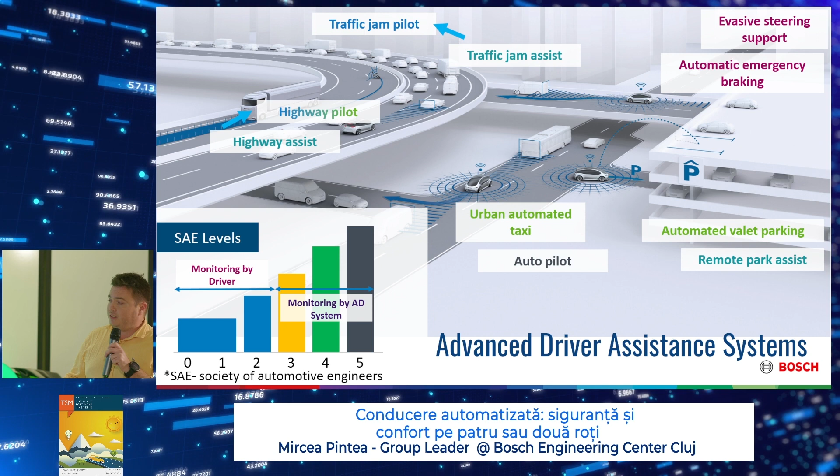Okay, good. As my colleagues mentioned at the beginning, we have the levels of autonomy in driving. We have from 0 to 5, and you will see that each function has a specific level considering the complexity of the function.

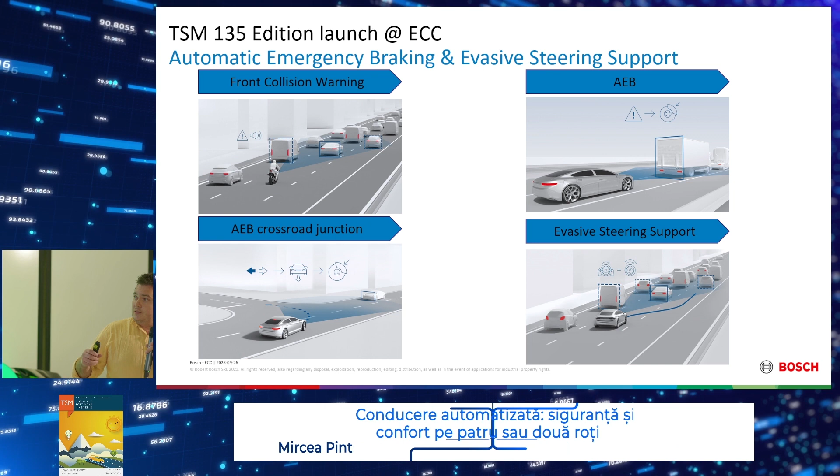If we are starting from basics, literally basics, we have the front radar, and we have the function for front collision warning. For example, if you are going with a car at around 100 kilometers per hour, you have a vehicle in front of you, and the vehicle is either stationary or moving very slow. The first step is that you will receive a warning on your dash telling you that you should brake. This warning should be either a sound or a message on your dash.

If we go to a next step, how we can extend this front collision warning, we have the actual AEB, automatic emergency braking. This actually calculates if the driver is able to stop in the end, and if not, or if the driver is not doing anything, the vehicle will actually stop stationary before an object.

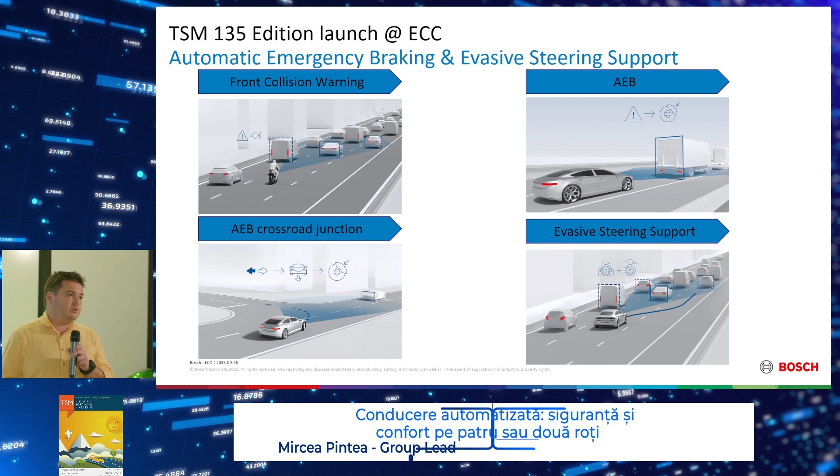Imagine that the driver is still pushing the brake a little bit, but not fully, and the car is realizing that there will be no possibility to stop the car. What will happen? The car will take control and will automatically apply full braking power in order to stop the vehicle before the object that is in front of the car.

If we take the next step, to make it even more complex, we have the AEB for crossroad junctions. Imagine that you are at a crossroad. You have a vehicle either coming from incoming traffic, so from the front, or you have a vehicle coming from the left or from the right. You have the video and also the radar, which detect that vehicle, and it's actually stopping the vehicle in the end to not have an accident.

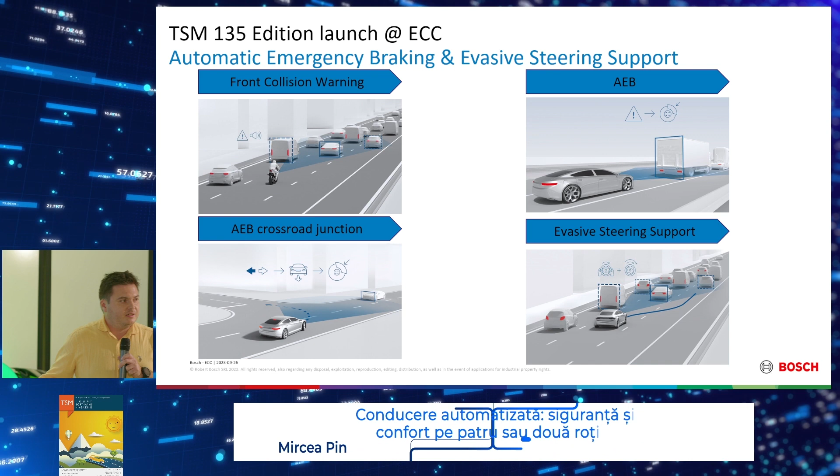Even more complex. And here we were discussing the levels, level 1, 2, 3, 4. My colleagues presented at the beginning that there are vehicles on the market with level 3, the Mercedes. Actually, that car is able to go 80 kilometers per hour on the highway. If I remember well, that is the maximum speed. And in certain conditions, it's able to take full control of the car.

Now, imagine that the car is not able to stop and has to do a right turn or a left turn. With the sensors that we have on the vehicle, the car is actually able to change the lane. For this, we will use all the sensors on the vehicle. We have the corner radars, which are mounted in the back corners of the car. We are using the front camera, front radar, and in the end we are giving the command to the steering to move left or right in order to avoid the accident.

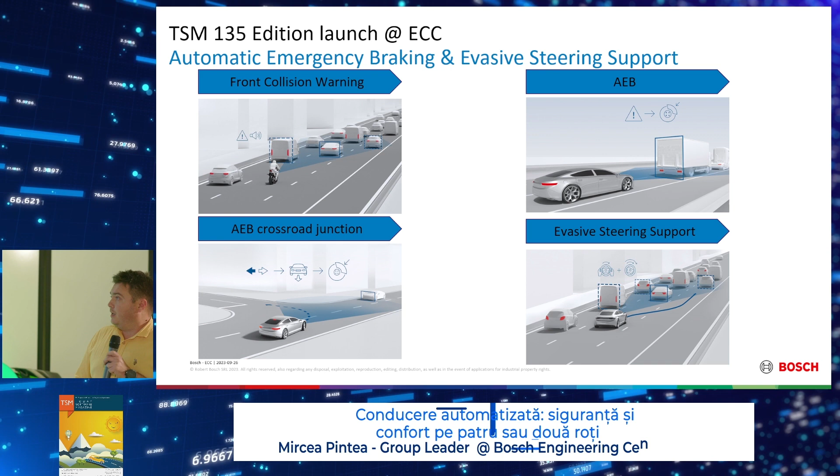What I didn't mention at the beginning is that these ADAS functions are split into active or passive functions, but also ADAS takes care of safety and also comfort. The functions that I mentioned before are specifically for safety, so they are braking functions or evasive functions.

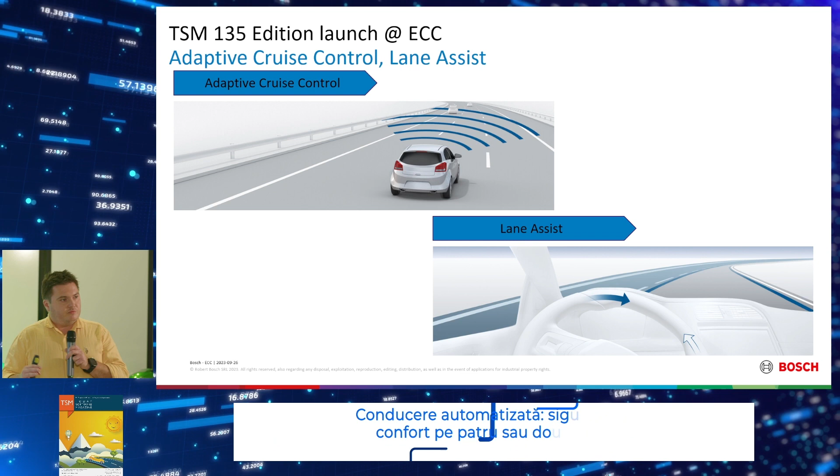And if we are speaking about functions that help us and make our life easier, we are speaking about the comfort functions. One of the basics for the comfort functions is adaptive cruise control. This was the basic. It was invented years ago. It is available on a lot of cars on the market, on the road, and is quite robust for the moment.

But if we make it even more complicated, so not having only the radar sensors, but also the video sensor, we are able to also keep the lane. So we have a car which is able to either keep itself between the lanes or give a warning that we are leaving the lane.

So we have the lane assist function, which can go from warning to centering lane keeping, where the car is actually even able to steer between the lanes and fully go forward. If we are making it even more complex,

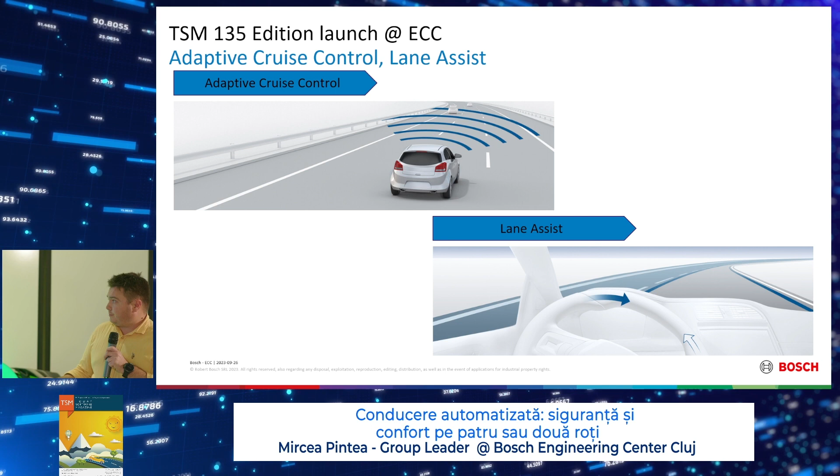then we are speaking about the blind spot monitoring. And for blind spot monitoring, we are monitoring actually the back of the car. We are having two main sensors in the back of the car, the corner sensors. We are monitoring an area behind the car of around 3 meters, which is considered the blind spot monitoring. And with the radars, we are tracing the objects which are coming from far away.

When the car actually is entering the area, which is specific to the 3 meters square in the back of the car, we are just able to give a warning to the driver, and we have a warning in the mirrors. So we have a LED, which is lighting up and informing that eventually we have something in the blind spot.

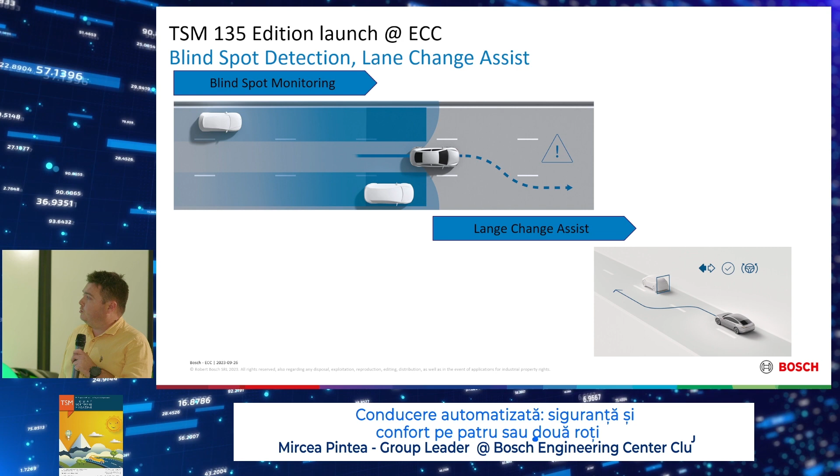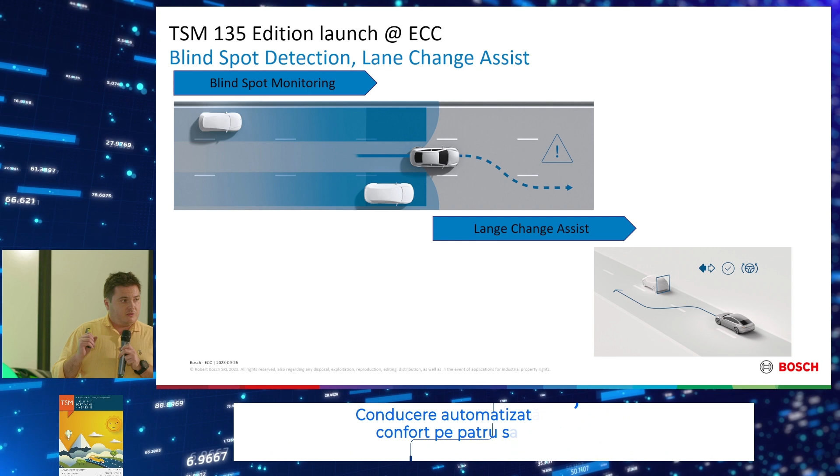If we are doing even more complex and we are using also the functions that I mentioned until now, we can speak also about the lane change assist. Here we are not changing the lane because of an emergency in the front, but somehow it's a comfort function. We are monitoring the rear part of the car, we are monitoring the front part of the car, and we are able to overtake somebody on the highway and go forward.

And if we are putting all of these functions together, we are reaching the pilots. We have traffic jam pilot, highway pilot, where somehow we have the vehicles taking care about the road, but there has to be full supervision of the driver.

How these are working, for example, traffic jam pilot. Imagine the roads that we have in Cluj, where we have a lot of traffic. You activate that function, you set up a speed, and actually your car is following the traffic that you have in front, capable to brake, accelerate as many times as is needed. Of course, it has also a safety function: if there are more than 10 seconds, for example, automatically it's disengaged, and in order to re-engage it, you need to press a button.

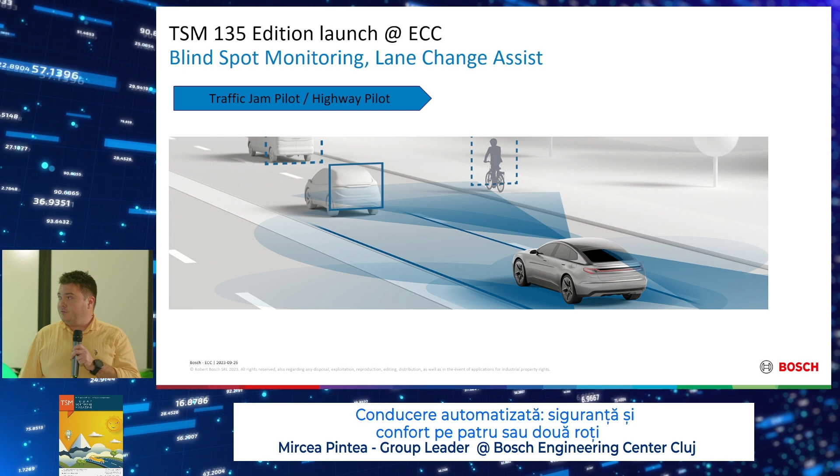For the highway pilot, something similar. The car is able to follow the cars in front of you, is able to change lanes, and is also able to detect the obstacles in front of you. We discussed about ADAS, and somehow the functions are already there since a while. Nothing necessarily new, but somehow they are the basics for driver assistance and for the future autonomous driving.

If we are speaking about motorcycles, this is a completely new world. This is something completely new, and even on the market, there are few motorcycles which are able to cope with the functions that are currently developed. What do we have on the motorcycle? We have it also here. We have a front radar, which is mounted in the front in order to scan the traffic in front. We have the HMI, so the dash, where you have the warnings, speed, and any message that is needed.

Then you have the engine control unit that you will see later that we need to control. We have the motorcycle stability control ECU, which is taking care about the braking of the motorcycle, and also we have the rear radar, which is monitoring the rear part of the traffic.

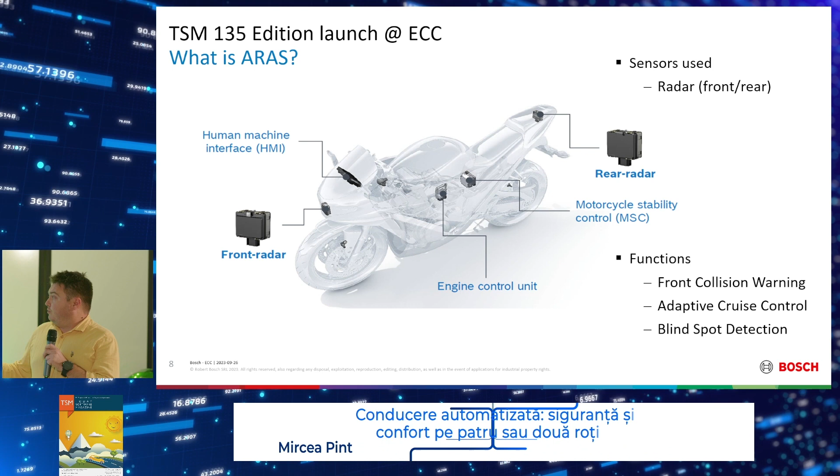If we are speaking about functions, definitely we don't have braking functions. Imagine having a full autonomous braking on a motorcycle. An emergency braking that will happen on a motorcycle will definitely be the end of the rider. Adaptive cruise control is something that we have. Front collision warning, so just a warning for the collision, is something that we have, and blind spot detection also is available.

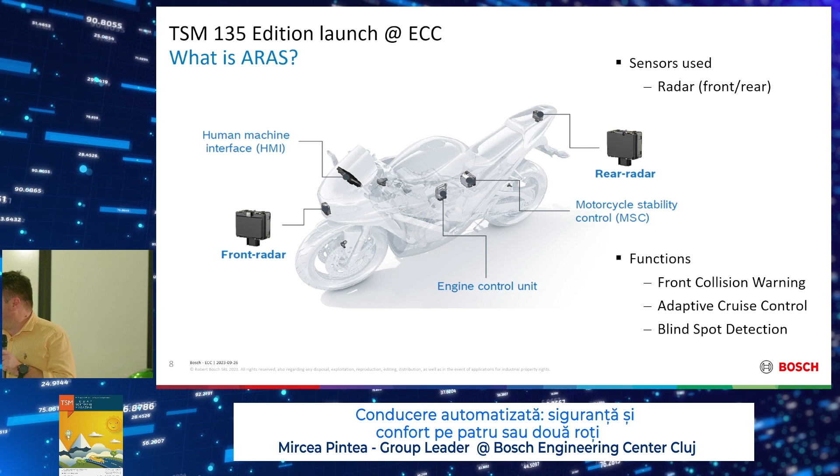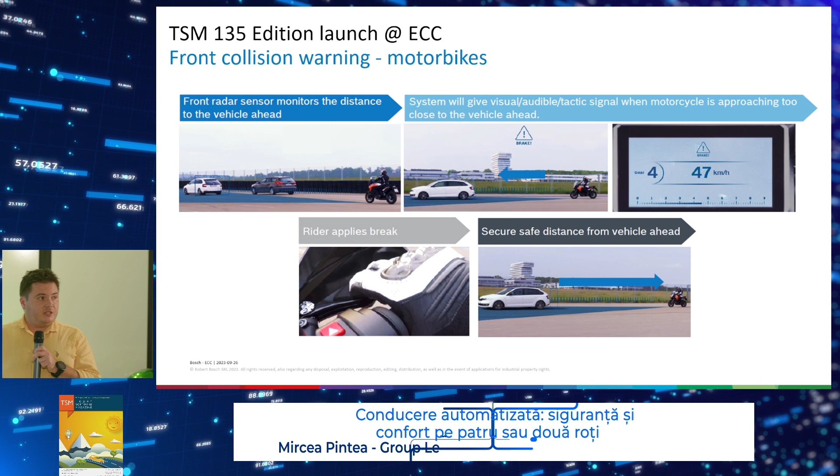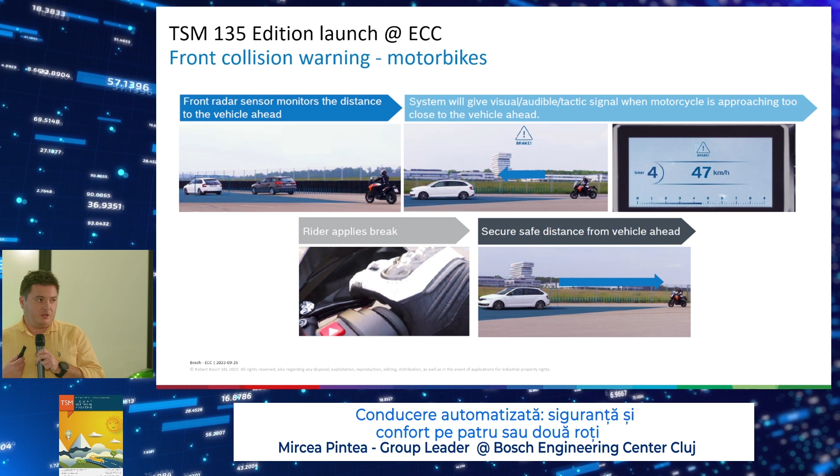How actually are these working? Exactly like I explained in the case of the vehicles, we have the target vehicle in front of us. The motorcycle is detecting that we might not be able to fully brake until we reach the target vehicle in front. And in the end it is giving us a message, please brake, and is flashing a light. You will see it in the movie that I will show you a little bit later. Our responsibility is fully there, so we need to brake until we stop. The motorcycle will not stop by its own.

If we speak about adaptive cruise control, it's exactly the same like in the cars. Nothing fancy, but again, it's a little bit more difficult than in the case of the vehicles. The driver is selecting a specific speed. The radar in front is able to monitor a target in front, and is able to select a specific speed in order to keep a safety distance from the vehicle in front.

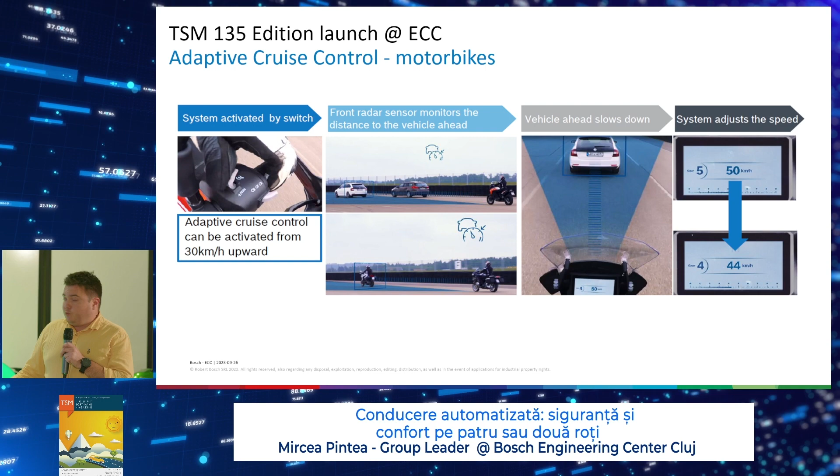In this case, the vehicle is able to brake, so the motorcycle will brake autonomously by 30 kilometers per hour. So the minimum speed will be 30 kilometers per hour for it, and it will monitor continuously the traffic in front.

Another feature that we have on the motorcycle also here is the blind spot monitoring. So we have the rear radar, which is monitoring the traffic behind the motorcycle. We have two LEDs in the mirrors, and in case we have a vehicle in the blind spot, the LED will light up.

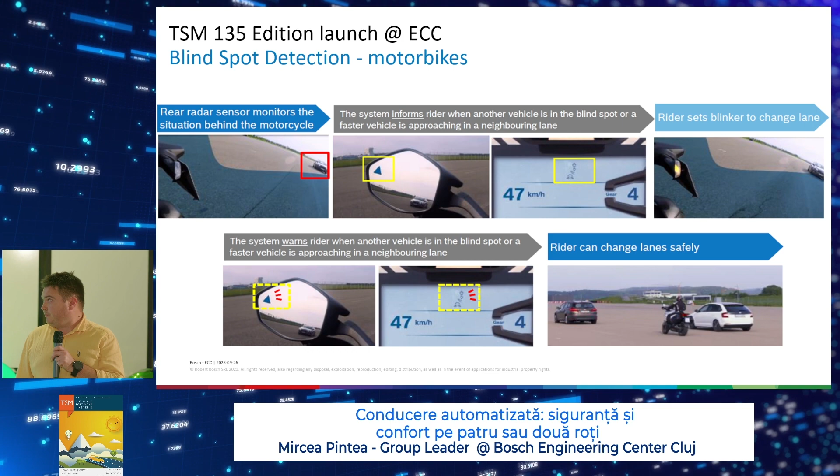If we go forward, we will see exactly how it's happening. And this is a video made by my colleague. Please look at the dash. So follow the dash, not the vehicle in front. You saw that the car was moving very fast in the back of the car, and now you see the warning. So this is the pre-warning that we really need to brake, otherwise we risk a crash. Again, a pre-warning in order to brake.

Here my colleague will do the demo for the ACC. So my colleague is setting up the ACC. He activated the ACC, and we are tracing the vehicle in front of us. The target speed now is 70 kilometers per hour, but the vehicle in front is having 63 kilometers per hour. So we are keeping the safe distance from the vehicle in front of us.

You will see that my colleague will accelerate in the end. We have the target speed of 90 kilometers per hour, and the vehicle in front is following him with 67 kilometers per hour. And you see another vehicle which is entering in front of the motorcycle. So in that moment, we had a second target, and we needed to brake.

What happened? There was also a blind spot part, but I don't know why it stopped. We had a demo also for the blind spot. No, it was not a crash. We managed to stop in time. It followed the new car. It stopped, and afterwards the car accelerated, exited the target that we had, and we had to follow again the red vehicle. But I don't know why the video stopped.

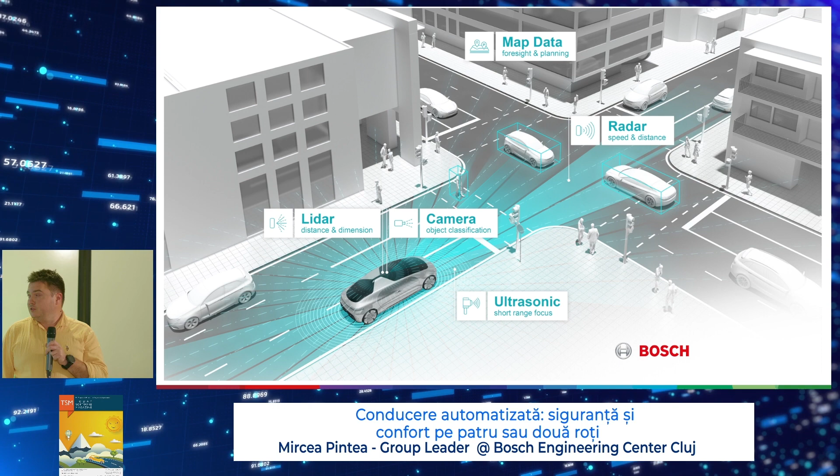I presented to you some basics, really basic functions. So ADAS functions that you see today in your vehicles. In order to go forward, beside what was presented until now, fancy ECUs which are able to cope with a lot of calculations, sensors that are ultra performant in order to detect the environment in front of them, we had also to consider the GPS location and also the car-to-car communication in order to have the future autonomous vehicles. Any questions?

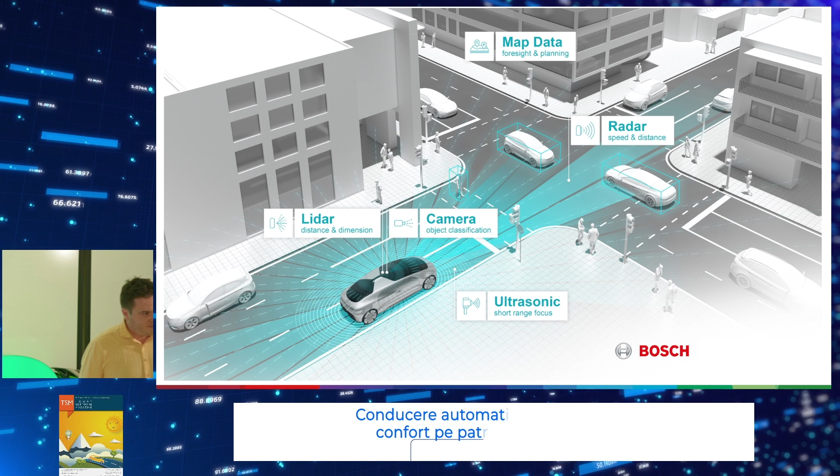Mircea, you presented many solutions. How is the hardware solution comprised? I mean, each sensor has its own processing unit, or they are split between video processing and sensor processing and so on, and the radars?

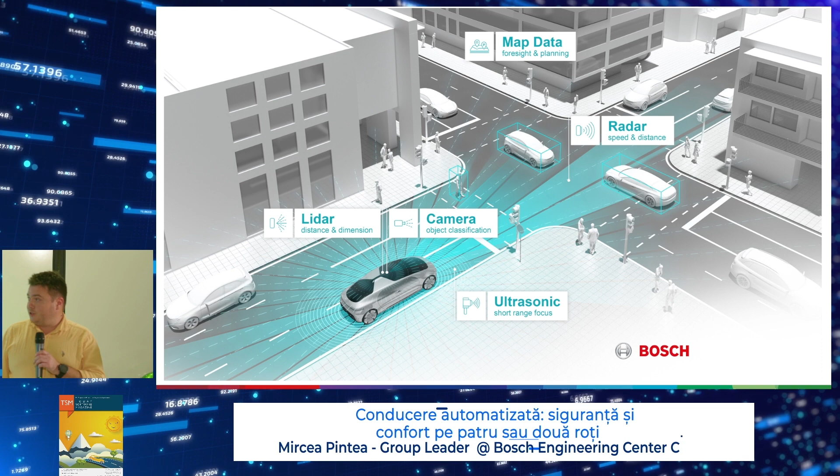Yeah, that's a very good question. So when we discussed about the ADAS functions, the camera is somehow the main. Usually it's scanning the road in front of it, it's making the decision, and it's receiving information from the radar, which is creating the objects that it's detecting around it and giving those objects to the camera in order to take the decision, to brake or to steer or other things. And of course, without fusion, you cannot do this.

Also, when we discussed about advanced driving functions, where we had the traffic pilot or the traffic jam assist, highway pilot, those functions are also functioning with fusion between multiple cameras and multiple radars. The decision usually in current days is happening on the camera level. Does it use a dedicated processor? Honestly, I don't know.

But somehow we are sending from radar, for example, to video direct objects. So we are telling them that there is a specific object. The camera is doing on its side the processing of the image, separately, and comparing if those objects are in the field or not. If they are confirmed, then we have to take a decision. But the image processing is done separately. Radar is computing everything separately, and afterwards you combine them into one information. Please.

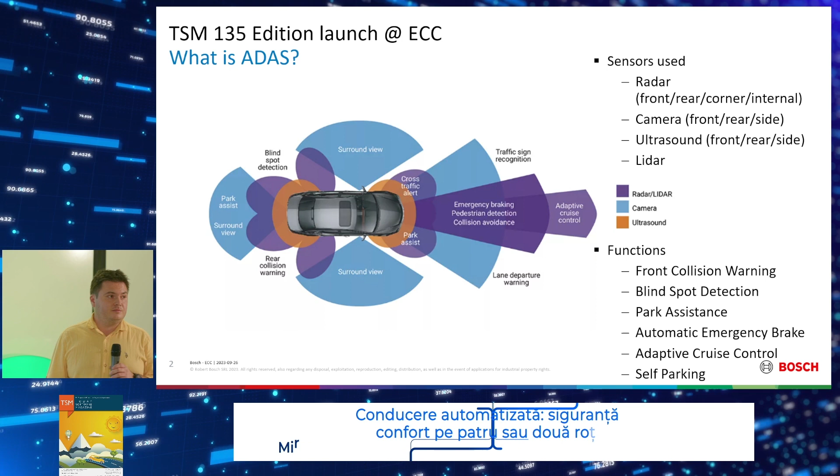So about the ACC function for the motorcycle, you mentioned at some point that there is a limit of 30 kilometers per hour for it to function. Why is that? And also, is there a maximum limit? Maximum limit depends on the capability of the radar. So the radars today are able to cope with higher speed, even 200 kilometers per hour. The point is that you need to detect something very far away. Imagine at 200 kilometers per hour how many meters you are going in 1 second.

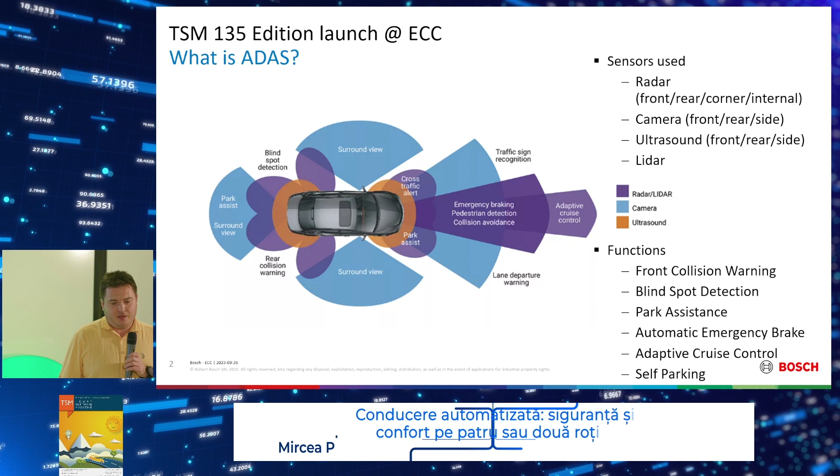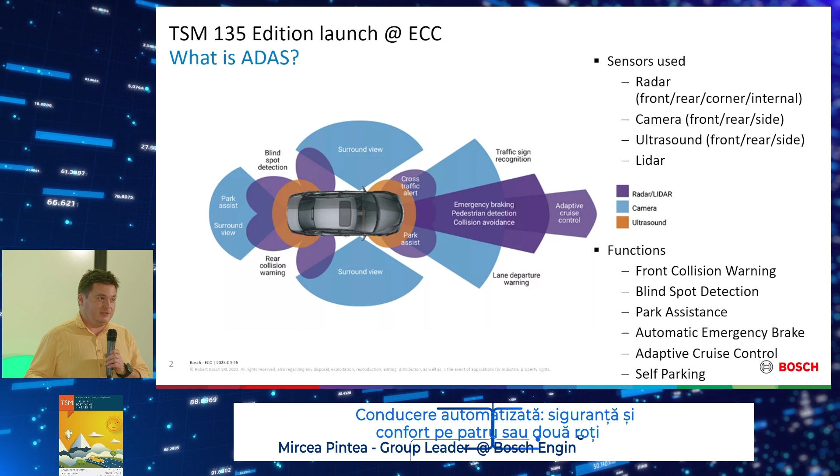And the minimum speed is coming also from the possibility to brake without falling from the motorcycle. At 30 kilometers per hour, there is a safe speed that you still are able to stay on the motorcycle. And also we are speaking about a manual transmission. Imagine that if you have an automatic transmission, it would be easier.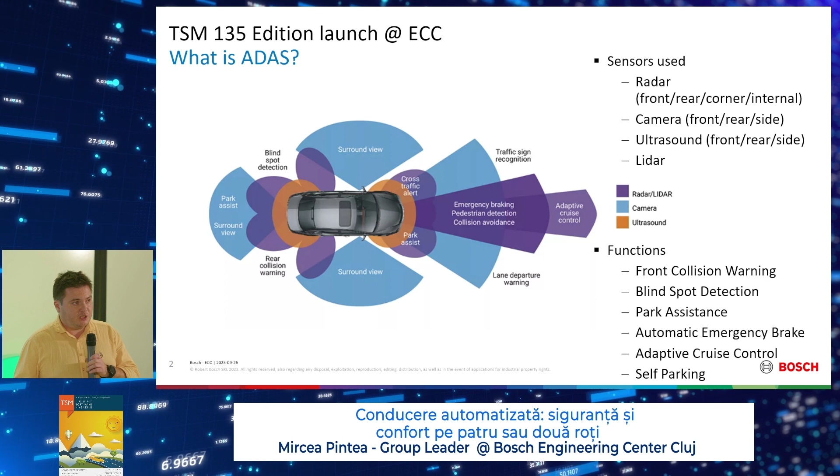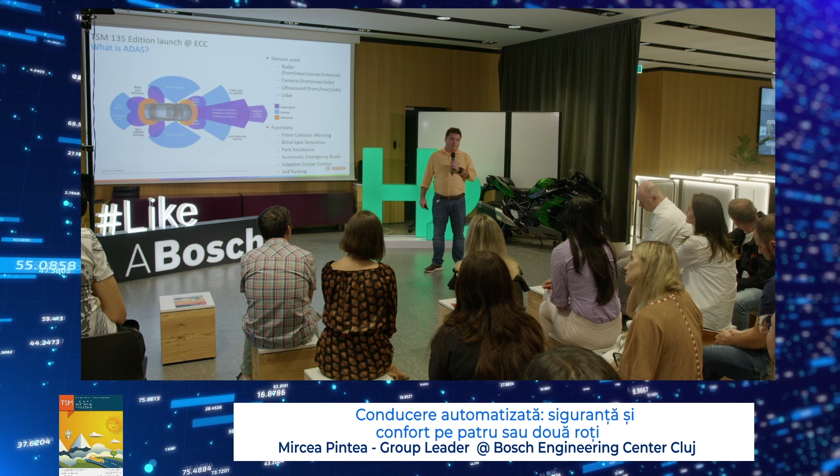In case of the cars, it's exactly the same. If you have a manual transmission, the ACC is able to brake minimum to 30 kilometers per hour, because otherwise the engine will stop. The same thing is happening also on the motorcycle. If you have an automatic transmission, usually the ACC is able to brake down to 0 kilometers per hour. So that's the minimum that you are able to do. And on the motorcycle, beside the gearbox, there is also a safe speed at which you are still able to stay on the motorcycle.